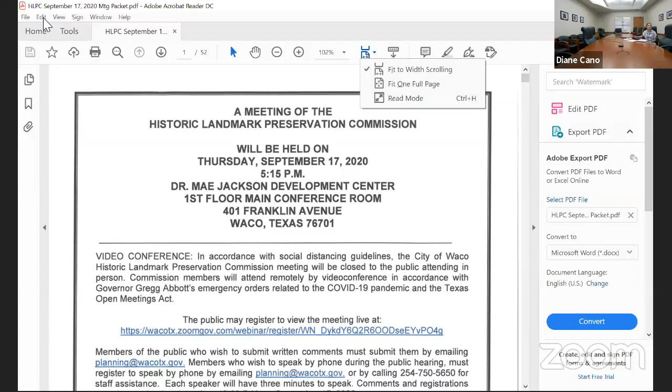I'm going to share the information that we have on this month's agenda. Is that too small for everyone to see? I can see it, but I can't. I can see it. I can certainly zoom in if I need to. Let's do a 1 page.

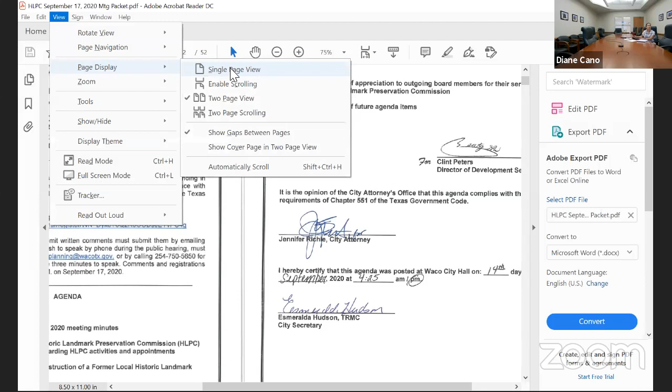This discussion item for the reconstruction of a former local historic landmark structure is in reference to what is now known as the Magnolia Church, now at 601 Webster Avenue.

Just an update as of this afternoon, the lead project manager for the project had a conflict and is unable to attend this meeting, and has requested that we, if possible, postpone discussion of this item to a future date. It is still on the agenda, and I'll say I could answer questions from a staff standpoint, but I'm not able to speak on behalf of the representative.

So I'm unable to answer any specific questions on the project, but Susie Wemberly, who is the project lead, has volunteered to offer her contact information if anyone has questions on the project between now and our next meeting. So that is that item.

Ken, it's up to you if you want to open it up for any sort of short discussion on that. Yeah, I was hoping to get just a little clarification on it. But does anyone else have a question right off the bat? I have a question. Sure, Don.

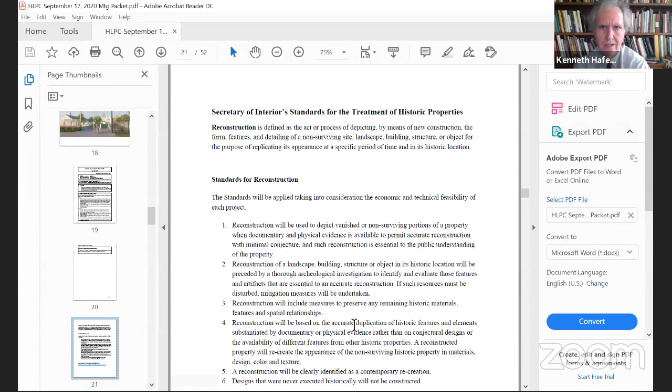And so on the findings, the first one says that the reconstruction will be based on the accurate duplication of historic features and elements and substantiated by documentary or physical evidence rather than on conjectural designs or the availability of different features from other historic structures. The reconstructed structures will recreate the appearance of the non-surviving historic structure in materials, design, color, and texture.

I guess this recommendation is coming out of cases like Colonial Williamsburg, where they reconstructed the Palace of the Governors on its original site, trying to make it as accurate a reconstruction, not conjectural.

And the phrase in there about rather than on conjectural design, guesswork, or the availability of different features from other historic structures, seems to be an indication that using historic materials from other buildings is not appropriate either.

But the thing I find confusing here is that we're talking about what is essentially a reconstruction and not on the original site, so it's sort of a double whammy. I'm fine with calling it a replica or an attempted replica, but there seemed to be an insinuation that they were moving the church, and it was pretty clear that the church was demolished.

It's on video, it's on film. The walls came down, the roof came down, and the Magnolia folks said that it was structurally unsound. That may well be true, but that doesn't make the replica the actual church. I'm actually concerned about having a marker claiming that it's the Second Presbyterian Church that's been moved when virtually every bit of material is new.

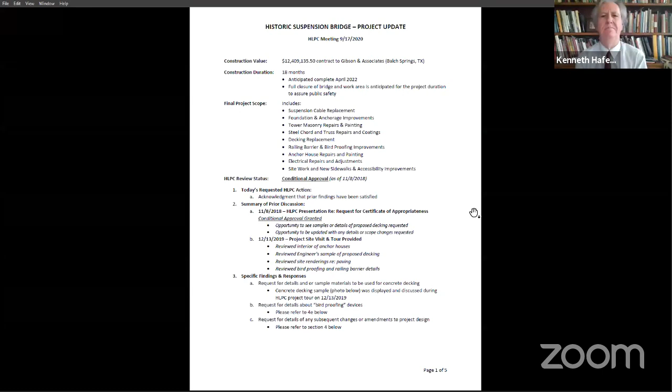Yes, okay. It's exciting to be at this point, bringing a very concrete update to y'all, because as you may recall, last time we met we were right on the cusp of bidding, and even the bidding process raised a lot of questions for us. This has become an even larger investment for the community than we initially envisioned. A lot has transpired since the process began in 2018. Everything is under construction right now. We have quite a few major infrastructure projects underway, and that and other factors have conspired to create a pretty large project for this community to take on.

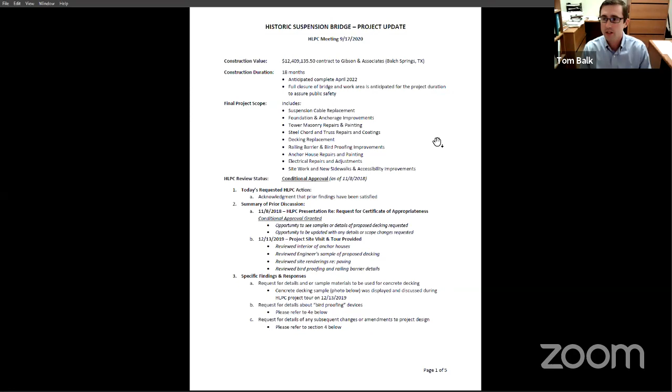Tom, could you zoom in a little bit? I'm squinting a bit. Yeah, absolutely. Is that better? Much better, thank you.

Okay, wonderful. So the results of our bidding answered a few questions for us. Now we know entirely what is in the full scope of the project, all the way down to some of the decisions among ad alternates, such as barriers for the railings and things like that. So I can talk from a position of pretty good certainty about final finishes and materials. We have a $12.4 million project conceived as an 18-month effort that's actually preparing to begin on site in about a month. In about 30 days we should see the contractor mobilizing to begin securing the site.

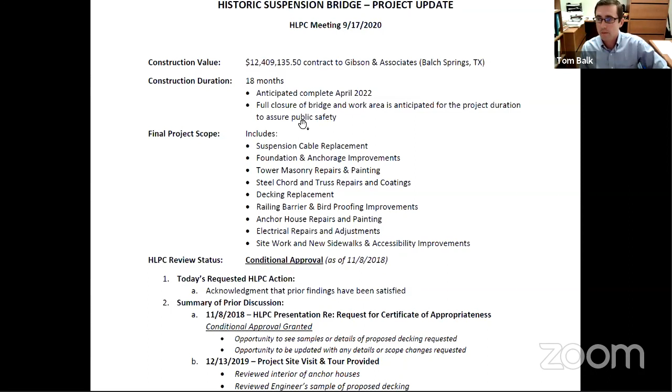So what we have in the scope of the project, as we've talked around several times before, but definitively, suspension cable replacement is the main thing that we began this process concerned about. The 100-year-old cables have exhibited some signs of stretching, and a calculated deadline was proposed that we have critical concerns if these aren't replaced by 2025, I believe was the deadline. So we put in effect some timely efforts to get a project underway.

With the cable replacement, necessarily, you've got to go in and repair or replace the anchorages those cables tie to, the original 1914 anchorages. Some of them are exhibiting signs of rust and section loss. So the engineer has figured out a way for us to excavate through the existing foundations to preserve the original 1914 alignment of the cables and anchorages, replacing them with contemporary components that will result in not only the look we're trying to preserve, but also the benefits of modern steel. The capacity will be considerably higher for the strength of this bridge, which is very reassuring from a Parks Department standpoint, where we host public events on the bridge.

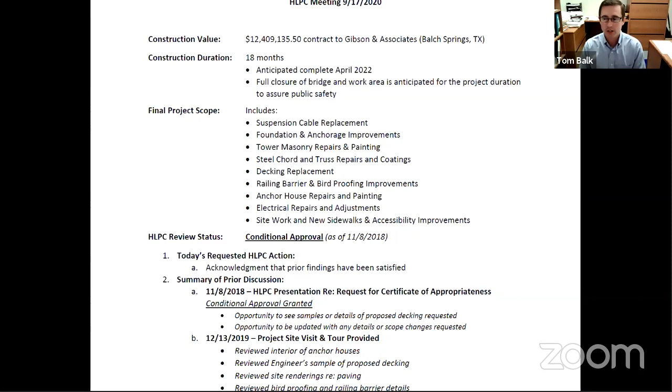There's also generations of electrical work in each of these anchor houses, and anything no longer in service will be removed. That helps us from a safety standpoint, but also from an aesthetic standpoint, both interior and exterior. Site work involves some new sidewalk, a considerable amount, to create new plaza approaches on both sides of the bridge that match. Presently they have a combination of pavers, sidewalk, grass, mud, et cetera. This is a very high traffic location for us, so it needs to perform the way we can maintain it and look our best every day, but also needs to be sensitive to the context.

To go through a few specific questions that came out of our last face-to-face, there were concerns about us proposing an unconventional decking system, and what that looks like and how it works. One of the great opportunities of the tour was that we have a sample the engineers created, which we've been storing on site, and with the tour many of us were able to look at it together.

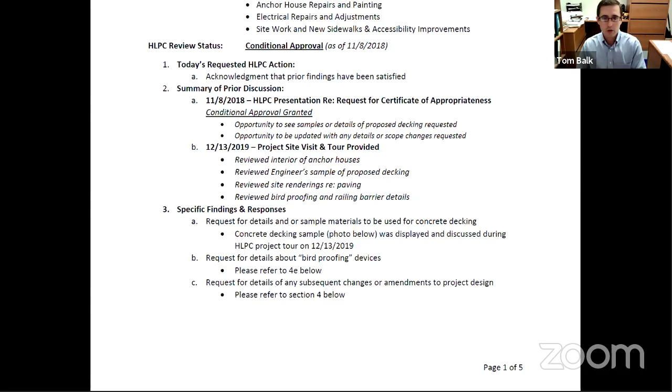I forgot to include the actual photo as an exhibit in what you may have had access to in advance, but this was the best photo I was able to pull from my record. You can kind of see this is trying to demonstrate the full construction technique. There's a sample I-beam at the bottom, this is the fiberglass deck pan, and then the stainless steel rebar.

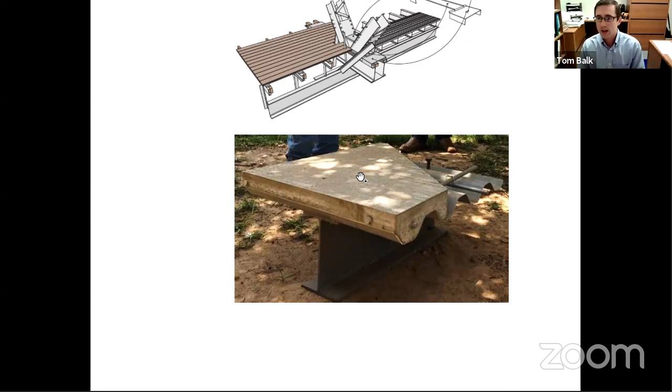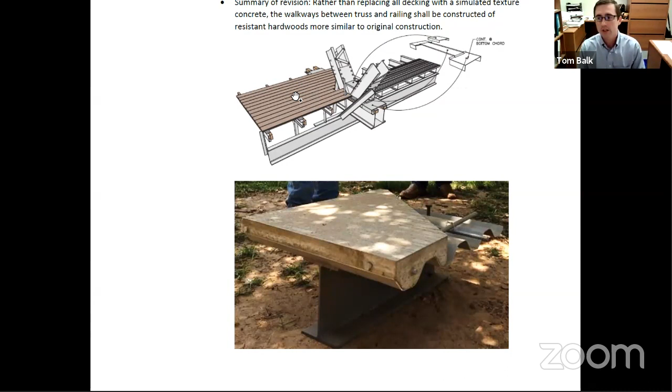The most important part here, hard to discern from the photo, is the texture on top. There will be a tined grooved pattern that will emulate the pattern of the wood decking we have presently, which the contractor will be able to provide. The diagram above, which you have in your summary, illustrates what I was discussing before, where the center span will be the concrete decking as proposed, and the side decking will again be a wood material, a hardwood material resistant in all the ways we need. That's the recap of the decking discussion, and I hope that makes a good faith effort to get everybody comfortable with what's proposed.

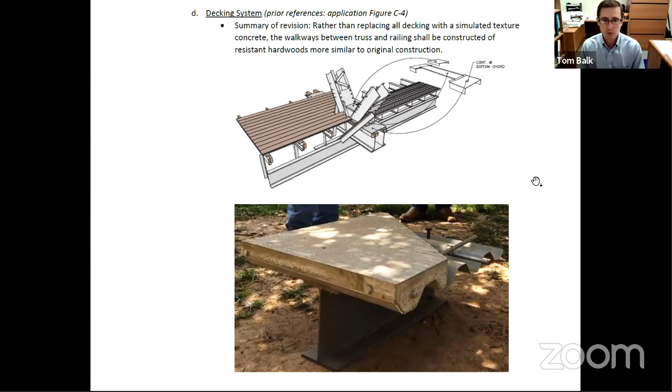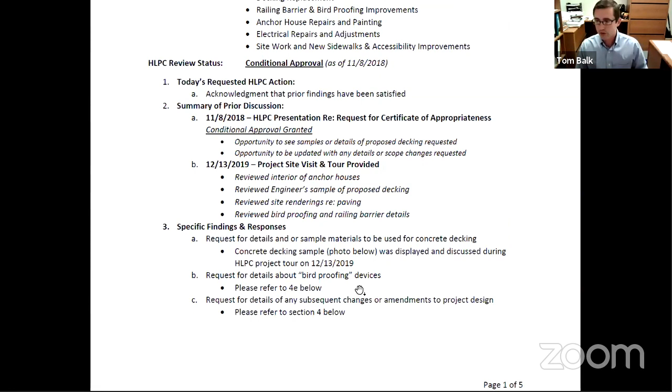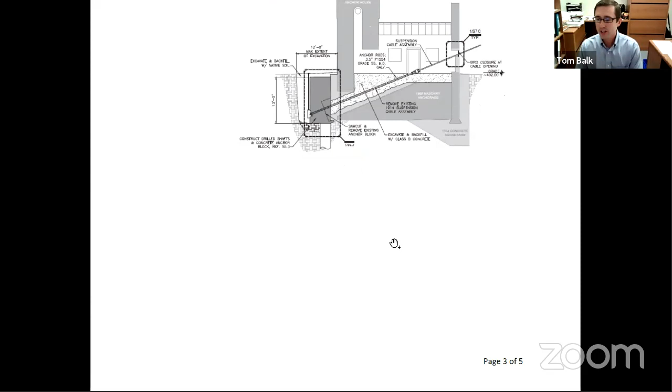Back to this list, the specific questions also involved bird proofing devices. What was in the original application was a diagram of what had been described as bird exclusion devices or screening. What that boils down to is we've got a series of openings we need to be very mindful of, particularly at the top of the towers, where the cables go up and over and sit on a metal saddle, which requires some limited movement.

That saddle requires periodic maintenance and greasing, so it'll be serviced as part of this project as well, but those same saddles will be used. However, we need to keep the birds out to reduce the amount of guano buildup, which is acidic or corrosive - I'm not sure which - but it has promoted a lot of corrosion of those saddles. There previously may have been efforts to use hardware cloth or chicken wire to reduce the amount of pigeons or owls roosting there, but it hasn't held up over time, which led the design team toward a more durable, permanent solution.

And so this material here, we're looking at it digitally, so scale is somewhat meaningless, but in print format, if you were to print these 8.5 by 11s, this is at scale. So it is a perforated steel panel that's galvanized or has some inherent metal treatment, but then it will be painted to be as invisible as possible.

So what we have right now are these openings at the top, and what you see is the darkness of the shaded cavity there. I anticipate we will go through a mock-up process where we're looking for the most appropriate shade color, so it'll probably be a matte dark finish on these materials up high. They're also needed down low where the cables come into the anchor houses. This illustration on the left speaks to how those cables go through an opening, spreading out to be side by side as they enter the building.

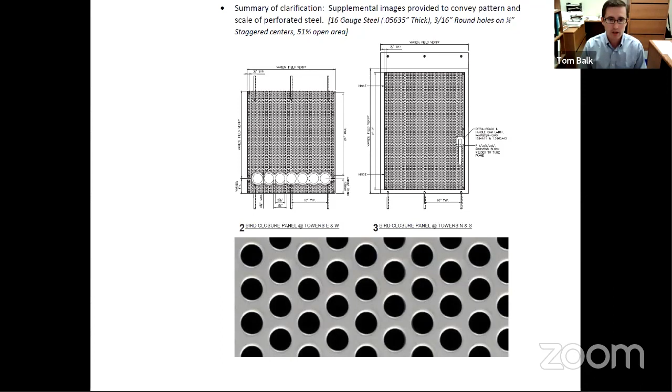That's a process we've communicated very thoroughly with the contracting team, that there are a certain number of submittal decisions the engineer will likely have final input on, but any and all aesthetic and material decisions will be retained at the City of Waco level. We're very sensitive to the aesthetic needs of the project.

So the third and final key instruction was: we are approving what is in these plans, or getting comfortable with what's in these plans, but if these plans change, as construction projects are subject to do, some process of notification and return update is needed, and I fully embrace that.

So we've got an 18-month construction period, and any number of things can come up. I don't anticipate a lot of problems—I'm an optimist. However, contractors are pretty good at letting me know when we need to come up with a creative solution to something that's in the plans.

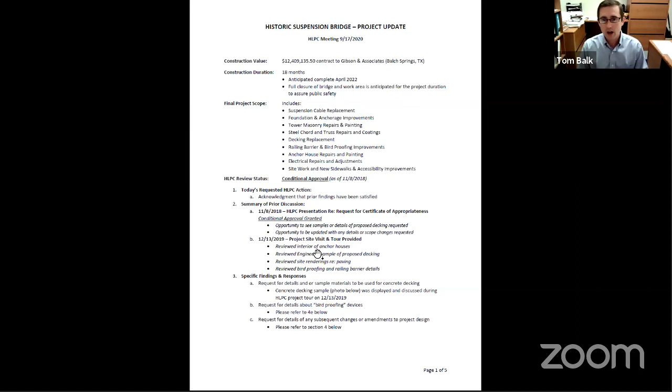And so as those items come to our attention, anything that significantly alters our approach here—I'm here, so I'm more than happy to come back again and again as needed. For the purposes of this report, though, I've tried to delineate what are the things that have changed since the application was turned in.

So we've gone through the majority of them, but the barrier screen—we had an option in the plans that was more economical, and we had an add alternate in the bid that is more sensitive to the configuration of the existing railing. Fortunately, we were able to accept the add alternate. I'm clarifying that here in section 4A.

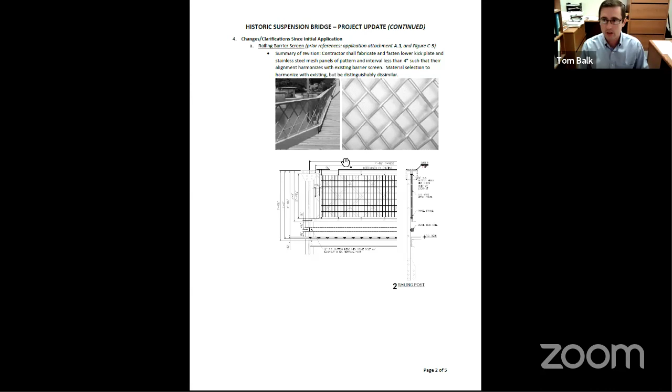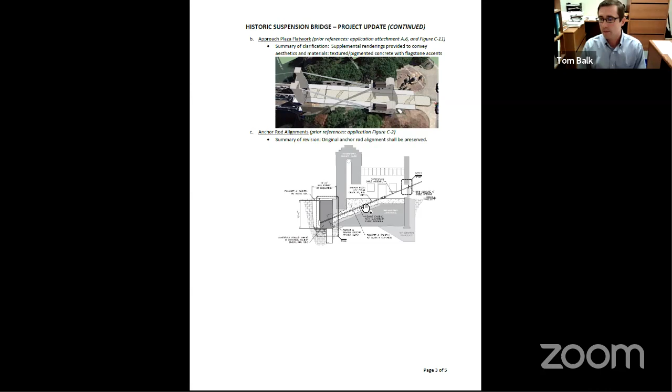The anchor rod alignment—we were relieved to be able to, rather than... there was some debate actually about cutting and leaving the existing anchor rods in place, or trying to keep the existing alignment. I think aesthetically, to remain true to the structure, preserving that existing cable alignment ended up being more important. So the trade-off is that the existing anchor rods embedded in the concrete will have to come out. That was a pretty critical structural decision, though.

The decking we've spoken about, the bird proofing we've spoken about—so those are the highlights, and I'm more than happy to turn it over for any questions there may be.

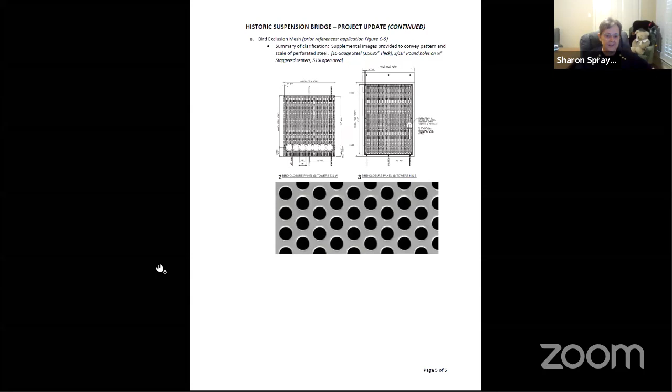Okay, do we have questions from the commission? I would like to ask, we brought this up last time you presented to us, Tom. We talked about getting a live cam so the community could watch this project as it begins. You said it might begin in about 30 days, and I would love it if you could speak to that.

This is an interesting question, because it's on my wish list too. We in the Parks Department haven't been set up for this, but I do know that in Indian Spring Park there is a camera. I don't know if it's a security camera or a police camera specifically, but it is my hope still to work with municipal information to use that footage that's already rolling, footage from that camera through the life of the project, to be able to document the progress. So the live question is still unclear to me, but we will absolutely have footage of the progress, and that's at least a partial win. I'm working on the details still.

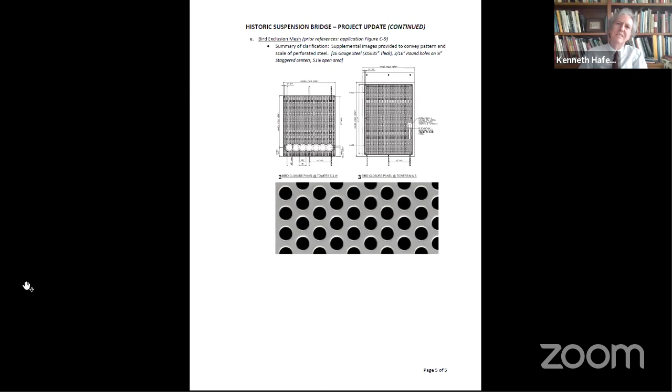Okay, thank you Sharon, good question. I have a question, Don. Don Davis has a question. Go for it, Don.

Apparently the previous bid proposals came in way over budget. What did you do to cut the pricing down, or did you?

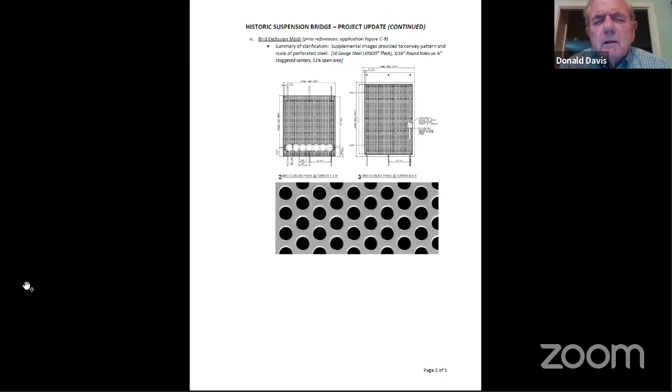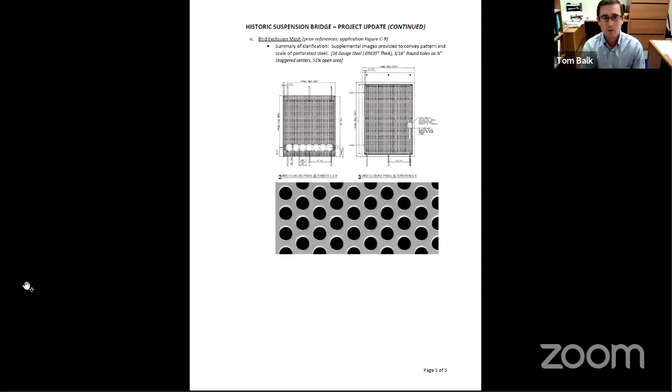That was definitely a painful process of weighing the options. When you get bad news, you don't have a ton of great options. We labored over a lot of that. We went through a bunch of scenarios of how we could cut the project to get closer to the original budget. But similar to council's first reaction to the project, when we identified that there was a very large project beyond just the cables that needed to take place—I'm talking 2016, 2017 when this first came up—council embraced the scope of that project and said, we're not going to break this into phases. What's right for the community and what's right for the bridge is to do this in one step. It minimizes the closures, addresses all the outstanding problems in one step, and we have a better quality result in the end.

Even after receiving a kind of staggering bid response, we looked at the array of options—from the hard money we already had set aside, asking what can we do for that money, all the way up to what can we do to identify supplemental funds needed to do the project the way we would really like to do it. And ultimately that won out.

Council and management worked wonders too, and there were a lot of sacrifices made. I'm well aware that some desires from other department projects, we weren't able to fund, but council and management are really committed to doing this project to the utmost. So not only were we able to fund the entire project, but even the add alternates that, since day one, we looked at as extras, are in here because this space is important. This landmark is important, and this is not just a once in a generation opportunity to do right by it—it's once in 100 years. So we really took that seriously.

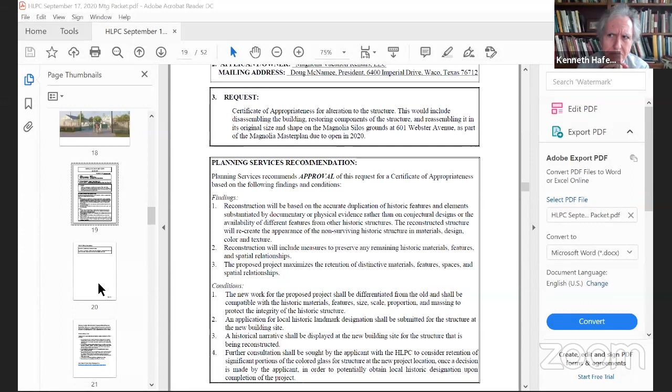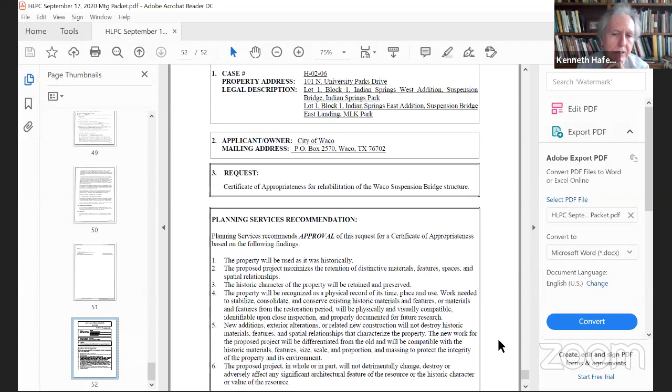The one thing I would ask about is kind of cosmetic, and that is about the color of the stucco. I really don't know much about what shades the stucco has been painted over the years. I know on a lot of historic structures you can have a variety of colors over the years. The old land office in Austin originally was a sort of stony off-white, and when the current Capitol was built in the 80s, they repainted it sort of pink to look like the red granite of the Capitol. Then when it was restored in the 1990s, they took it back to the original stony color. You could make a good case for either one. But is the plan right now to have it look pretty much the way it is now, or has there been much study of how it has looked at different stages in its life?

That's interesting. We've raised that question and that concern. It's a little troubling to try to determine what's original. What we do have in the archive is some notes about paint colors from previous renovations, and we felt like that was a pretty reasonable way to try to approach this one. So if we're at least taking it back to a documented point, then we're making a good faith effort to do right by the bridge.

I think the public expectation is that it's going to look as similar—if it looks drastically different, I think I'll be fielding some phone calls. But yeah, I think our conservative approach is to try to use those paint references that were in, I think, the '97 renovation. We have some plans. Okay. Yeah.

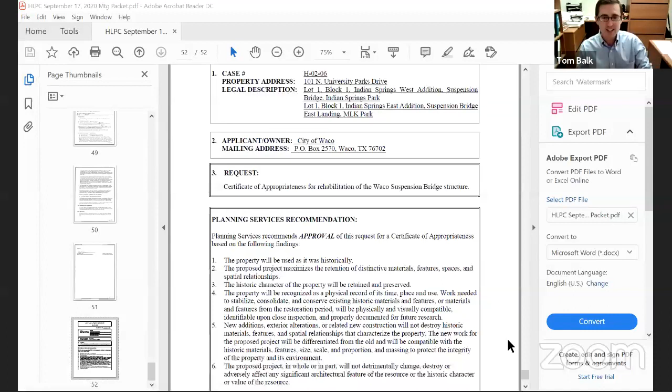Us too. Starting October 19th they should be in there, and 18 months after that we should be moving out. Fantastic, all right. Thank you all so much for your time. Thanks, thank you, Tom.

So I just pulled up the staff recommendation. This is the staff report for the certificate of appropriateness. These findings come out of our historic preservation ordinance - some of the criteria for a certificate of appropriateness for a landmark structure in Waco. I'll read through these in case you're not able to view them. Planning Services recommends approval of this request for the certificate of appropriateness based on the following findings.

One, the property will be used as it was historically. We know that historically it has been used as a suspension bridge - maybe not as originally intended for cattle runs, but it's been historically a pedestrian suspension bridge.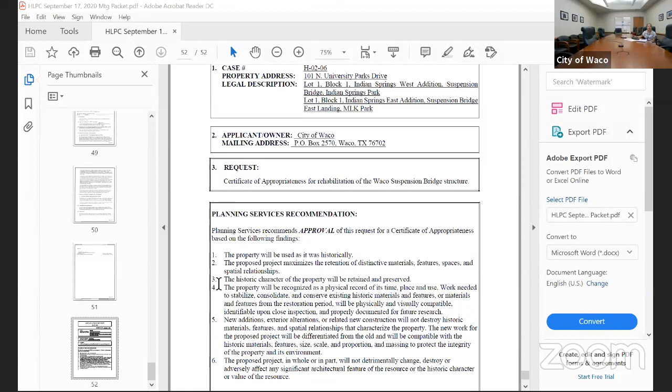Two, the proposed project maximizes the retention of distinctive materials, features, spaces, and spatial relationships. Three, the historic character of the property will be retained and preserved. Four, the property will be recognized as a physical record of its time, place, and use. Work needed to stabilize, consolidate, and conserve existing historic materials and features, or materials and features from the restoration period, will be physically and visually compatible, identifiable upon close inspection, and properly documented for future research.

As we know, Tom and his team have done a wonderful job making sure documentation is taken of the bridge and any changes in the past and future.

Five, new additions, exterior alterations, or related new construction will not destroy historic materials, features, and spatial relationships that characterize the property. The new work for the proposed project will be differentiated from the old and will be compatible with the historic materials, features, size, scale, proportion, and massing to protect the integrity of the property and its environment.

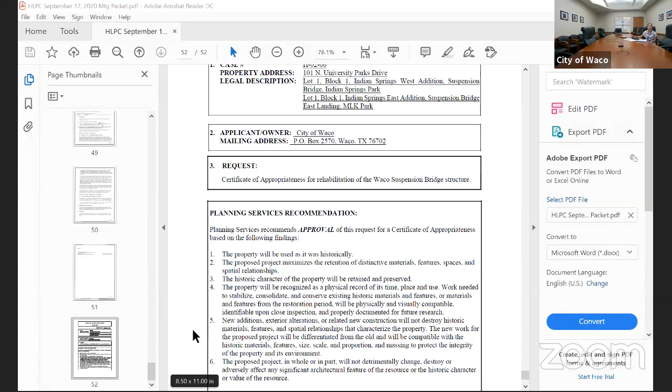And six, the proposed project in whole or in part will not detrimentally change, destroy, or adversely affect any significant architectural feature of the resource or the historic character or value of the resource. So those are the findings we've drafted, and you're welcome to discuss further, but that is Planning Services' recommendation.

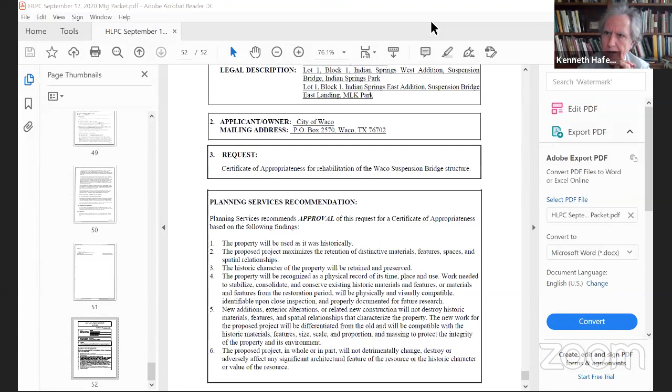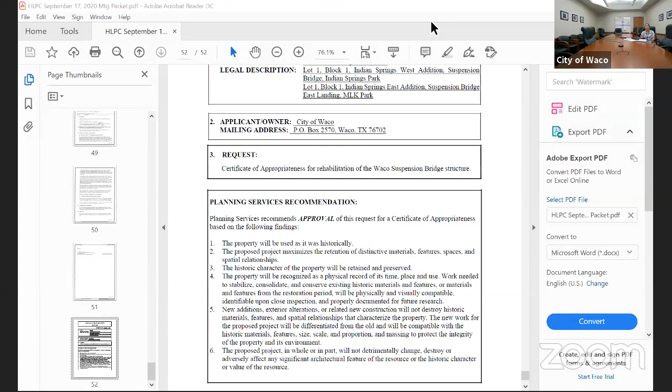If there's no other comment, are we ready to vote on the certificate of appropriateness? Yes. Is that what we need to do? Did we already vote on it? So the certificate of appropriateness was previously approved with conditions. So the action of the commission this evening would be to essentially take action on approval of the certificate of appropriateness and verify that these conditions have been met.

I make a motion to approve the certificate of appropriateness for this particular project. We have a motion from Sharon, second it - and we have a second from Dawn.

Any discussion? I have a question on this - our discussion point. If they choose during the project to change material or something, will we be notified, or how does that work?

So typically, if there's any sort of substantial changes to the project based on what was approved with the certificate of appropriateness, we do ask the applicants to come back for a little bit more review and verifying that it's in compliance with that certificate.

Yeah, we're not going to ask them to come back for every small change that doesn't substantially impact the historic integrity of the project. Okay, I'm glad you asked that. Other comments or questions about this? Seeing none, I guess we're ready for a vote.